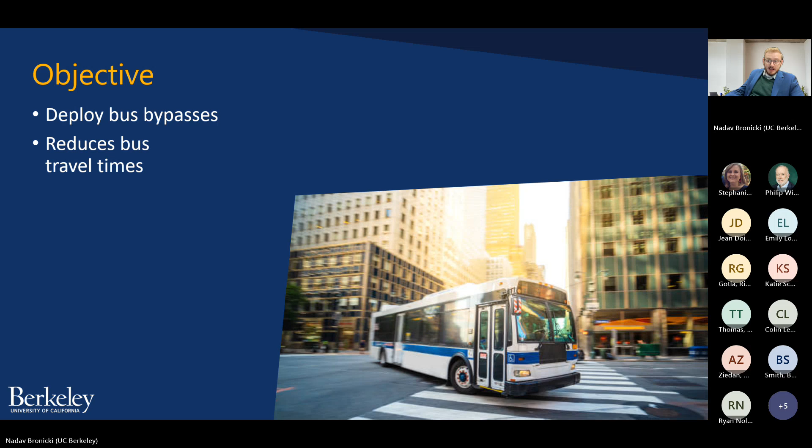Our study explores where these bus bypasses should be placed in a congested urban network, in a congested city, with the objective of reducing bus travel times, of speeding up buses. This is especially important during the peak hour, when spillover queues tend to grow long. These queues might originate from a few bottlenecks, from the network's critical bottlenecks, which restrict its capacity, but they grow, they spill over to fill many links.

This produces a state called hypercongestion, in which these spillover queues interfere with network circulation and block cars from proceeding through green lights. As a result, fewer trips can be completed, and the overall performance of the network is degraded.

This hypercongestion isn't just a problem for cars. It also slows down buses that share lanes with cars. This is called cross-modal interference. Anything that adds delays to cars will also add delay to buses traveling in shared lanes with cars. This means that as we try to help buses, we have to be mindful of how we slow down cars. Any added car congestion is going to adversely affect buses.

This is why we don't look at a couple of traditional interventions, starting with signal preemption. It might seem very helpful to give a green light out of turn to an approaching bus. It would speed up that bus, but doing so would disrupt the broader signal cycle, thus delay car traffic, which in turn will delay the buses that come after.

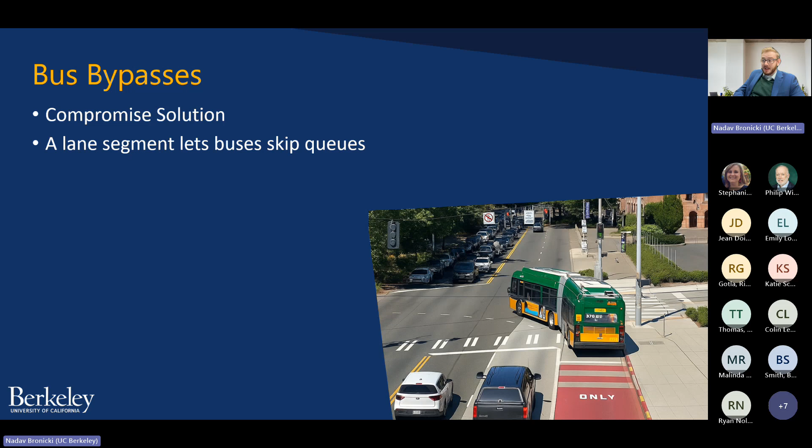This brings us to bus bypasses as a sort of middle ground solution. They are a measure that provides buses with some exclusive space, and some help getting through a signal, as I'll explain shortly. A bypass, at its most basic, is a lane segment that lets buses skip ahead of the queue at a light during a red, as you can see in this image.

The specific design we test, which is shown here, is taken from AASHTO's Transit Facilities Guidebook. It avoids the political problem of harming cars because it doesn't take a lane away from car traffic. Instead, the bypass might repurpose an existing right turn lane, in which case right turning cars would continue to use it. Alternatively, it could be set up by taking away a small amount of curbside parking.

This design also operates within the confines of the existing signal cycle to avoid disrupting signal coordination. During the first 5 to 10 seconds of the usual green phase, if a bus is present, a special bus signal will give that bus an early start, while cars are held back by a red. This allows the bus to move freely into the travel lanes downstream. After that 5 to 10 second increment, when the bus has gone through, all lights will show a green to let cars proceed.

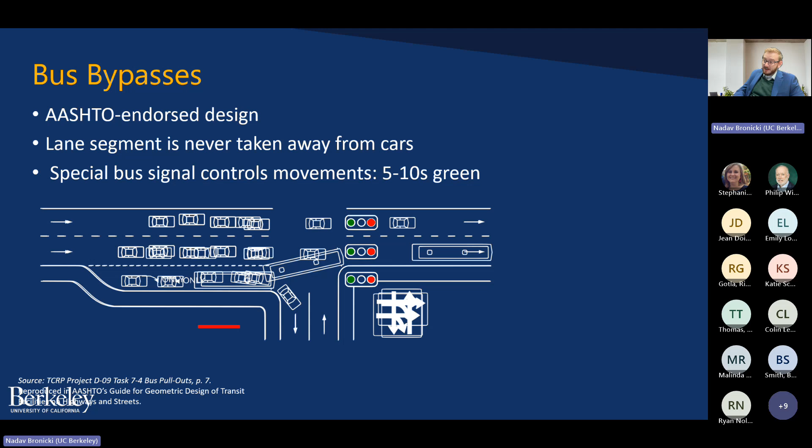AASHTO's guidebook recommends that a near-side bus stop should be placed in the bypass, since the bus will be dwelling there anyway. That makes a lot of sense. We adopt it in our study.

This sounds nice, but our experiments will show that not every hypercongested link is necessarily the right place for a bypass. We find that there are some locations where bypasses fail to help buses, or even harm them, as we will explain later. But to explore the bypass's benefits, or as it were its disbenefits, we need to model the network without a bypass. When we remove the bypass, the near-side bus stop remains, and we look at two placements for it. The first is an inline stop.

It is the least costly and the least space-consuming. At an inline stop, buses dwell in a travel lane while passengers board. By occupying a lane, buses obstruct car flows. However, one would expect this to be pretty favorable to buses who can proceed in and out of their stops with ease. Our findings will show, however, that these inline stops can be bad for buses and not just for cars, in the same circumstances that make bypasses ineffective.

As an alternative to inline stops, we will also consider offline stops. At these, the bus enters a pullout outside of the travel lane to serve passengers, which thus leaves car flows unobstructed. However, after it is finished serving passengers, the bus has to merge back into the busy traffic stream with no help. We would expect, therefore, that the offline stop should be quite bad for buses, but pretty good for cars. We will show, however, that the offline stop is, in some cases, the best treatment for buses as well.

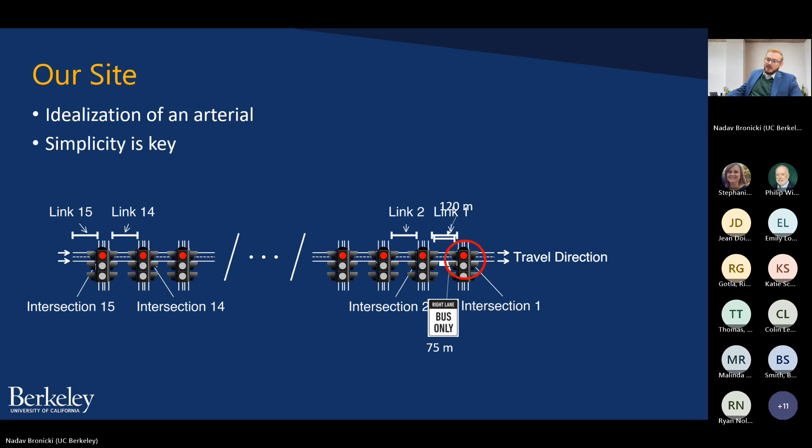We place a bottleneck, the critical bottleneck of this simple network, at the downstreammost intersection, intersection 1. The capacity of this intersection restricts the discharge flow of the arterial. Queues originate from here and propagate upstream to fill many links. Link 1, being the closest to the critical bottleneck, is the one where queues will form first and where they will persist the longest, which is why we study link 1 first. It is a high leverage location. The network is sensitive to changes that are made here.

And so we place a bus stop on this link, near side as per AASHTO's guidance, and treat it in 3 ways. We consider the offline stop, where the bus enters a pullout, an inline stop, where the bus dwells in a travel lane and obstructs cars, and we consider, of course, the bypass.

Our intuition tells us that the bypass could be really effective near the bottleneck. Because queues form here first and persist here the longest, the buses might get the most use out of it. We're not alone in this thinking. Reports from the practice suggest that bypasses are often placed deliberately at bottleneck locations.

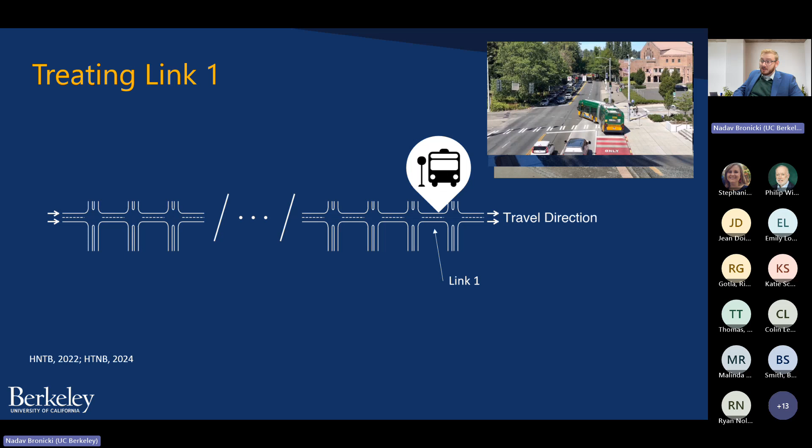The AASHTO guidebook, which is very specific on many aspects of deploying these bypasses, doesn't advise against this kind of deployment. We find that it should. Our findings show that a bypass should not be placed on this link so close to the critical bottleneck. You might find this to be surprising or even counterintuitive. I know I did. So, after I present our numerical results for treating link 1, I will explain the mechanism that causes this counterintuitive finding.

Those numerical results show that the best treatment for buses is in fact the offline stop, where they use a pullout and have to merge back into traffic with no help. With the offline stop deployed, buses take an average of 14.1 minutes to traverse the entire arterial. Cars are naturally a little bit faster, at 12.5 minutes.

The inline stop is a full minute worse for cars. This in itself is not surprising, as each bus blocks car traffic while passengers board and alight at the stop. But, more notably, the inline stop delays buses almost as much as it delays cars. The bypass works out similarly. It predictably harms cars, but it surprisingly fails to help buses.

If we generously assume that 5 seconds of exclusive green is always enough for buses to exit the bypass, we find that bus performance is unchanged, unimproved, relative to the offline stop, while cars are 0.6 minutes worse off. Performance for cars and buses is worse still if we assume conservatively that buses need 10 seconds to exit the bypass. Under this assumption, the bypass not only fails to help buses, it delays them by 1.5 minutes relative to the offline stop, while delaying cars by over 2 minutes.

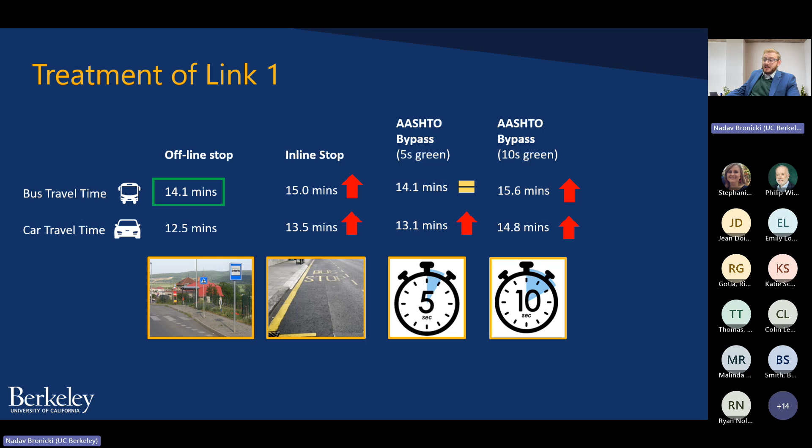I think this is quite perplexing. Offline stops force buses to merge back into traffic with no help and give them no appreciable direct benefit. So we would expect them to be the worst for buses, and yet they turn out to be the best. The reason for this is cross-modal interference caused by something we call voids.

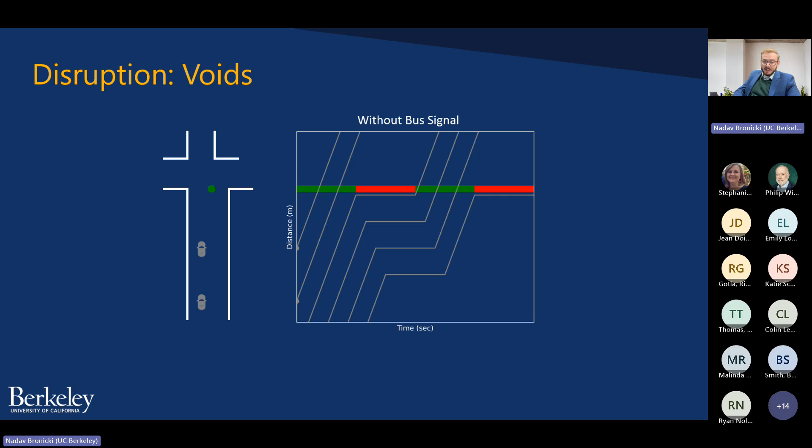We can understand them by looking at this time-space diagram with the signal of intersection 1 indicated by the green and red bars. When the special bus green is activated, indicated by these gray bars, it holds cars back. This creates a void in car flows. That void travels through the bottleneck and starves it of cars. As a result, the arterial's total outflow drops, and queues upstream grow longer. Buses get stuck in those queues too. Whatever time buses save thanks to the bypass is completely cancelled out and then some, as we just saw.

The inline stop is ineffective for very similar reasons. The bus blocking a lane also has the effect of starving the bottleneck by impeding flow. Whatever the buses gain from not having to merge out of a pullout is offset by the ensuing delays that they suffer in the shared queues upstream. Only the offline stop, however nominally bad for buses we think it to be, conserves flow through the bottleneck. And as a result, it ends up being the best for buses, not just for cars.

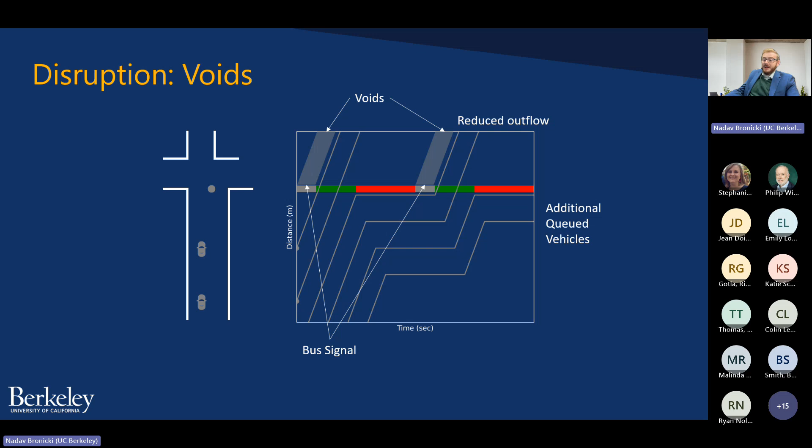At the bottleneck, a zero-sum strategy just doesn't work. A bus-favoring policy cannot afford to hurt cars. The best thing we can do for both modes is to preserve car flow to the bottleneck using the offline stop.

Having seen that bypasses are ineffective or even harmful near the bottleneck, we ask a new question. Does this bypass design work at all? To show that it does, we consider a scenario in which the bus stop is moved upstream to link 2. This is a hypercongested link, but one located a little further from the bottleneck. It turns out to be far enough upstream, at least in our setup, that voids do no harm.

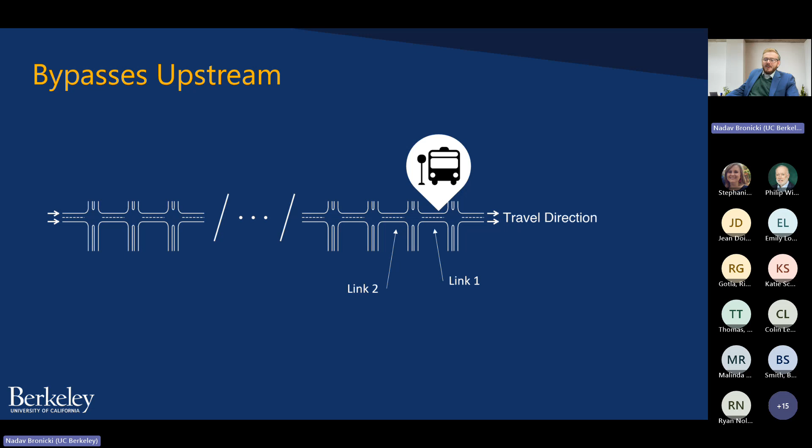Of course, relocating our treatment doesn't prevent voids from forming. The bypass and the inline stop still impede car flows and still produce voids, as we'll show in this time-space diagram. However, those voids never actually reach the critical bottleneck at intersection 1. Instead, as you can see, they hit the backs of queues and get compressed before ever reaching the bottleneck.

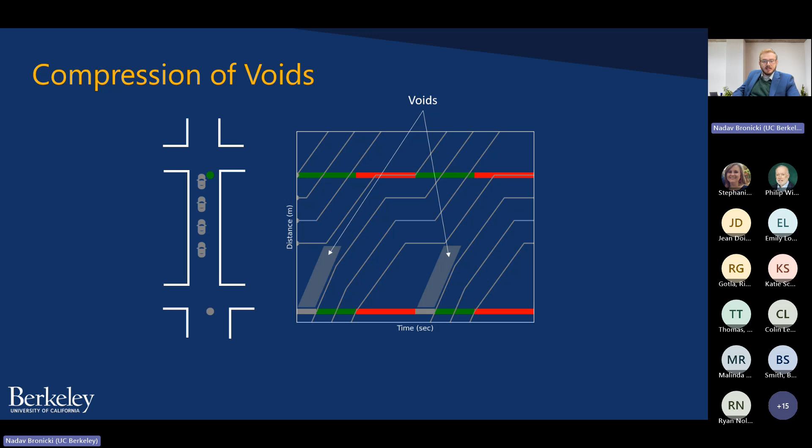Thus, flow is maintained and no one is delayed. And the results of this are as shown here. We'll start with the inline stop, where buses dwell in a traffic lane and obstruct car flows, which we expect to be quite bad for cars. When placed on link 2, sufficiently far upstream, the inline stop produces excellent car performance. The average travel time that you see, 12.6 minutes, is as good as anything that we saw on link 1.

Because voids are compressed, and the bottleneck is therefore not starved, the temporary obstruction of car flows by the inline stop doesn't matter. Buses thrive from this too. They avoid delays caused by voids, and they avoid delays caused by merging out of a pullout. The average travel time for buses that you see here, 13.8 minutes, is the best that we've seen yet. But we can do better by deploying the bypass.

Whether buses are given 5 or 10 seconds of green, car traffic is still unharmed because voids are still compressed. Buses, meanwhile, fully benefit from the bypass. Each bus gets to skip ahead of the queue without causing cross-modal damage that would delay the buses to come, so that on the whole, buses average 0.8 minutes of travel time saved, relative to the inline stop.

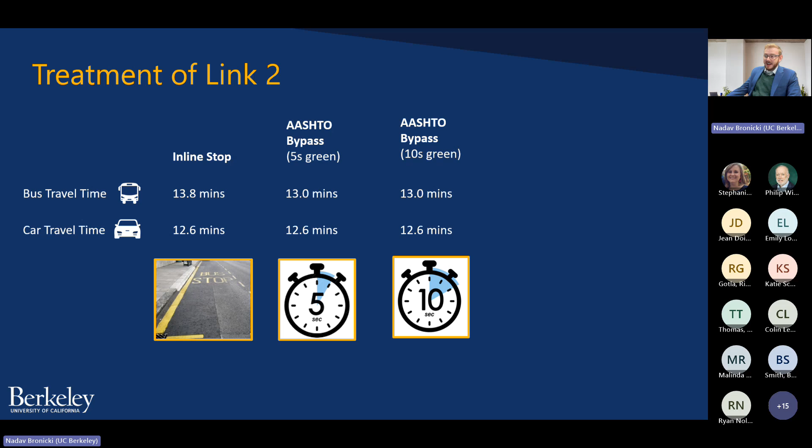That is the main point of our paper, and we could end the talk here, but there are some additional findings that I think are pretty interesting. There are some scenarios where the bottleneck's capacity is extremely low. We find that this makes voids less harmful, so that sometimes buses benefit from a bypass even at the bottleneck.

We also note that in a city, some links are longer than others. We find that cities can get a better return on investment by placing their bypasses on longer hypercongested links as opposed to shorter ones, provided that the bypasses are made proportionally longer to benefit. We further find that bypasses can be made more effective if they're deployed alongside a signal coordination scheme called backwards coordination, which is very suited to hypercongested conditions. We talk about all three of these insights in more depth in our paper.

Now, to recap, our findings point to a clear deployment strategy for bypasses in hypercongestion using the AASHTO endorsed design. A bypass should generally not be placed on the approach to a critical bottleneck. If there has to be a stop located on this link, it should be placed offline in a pullout, but nothing more should be done.

Upstream, any hypercongested link that has a stop is a good candidate for a bypass. Longer links with longer bypasses will yield greater time savings, but even short links make for good bypass locations. By deploying bypasses in this way, a city can significantly speed up buses, not by sacrificing cars, but by being mindful of them. The result is a Pareto efficient outcome. No one loses and buses benefit.